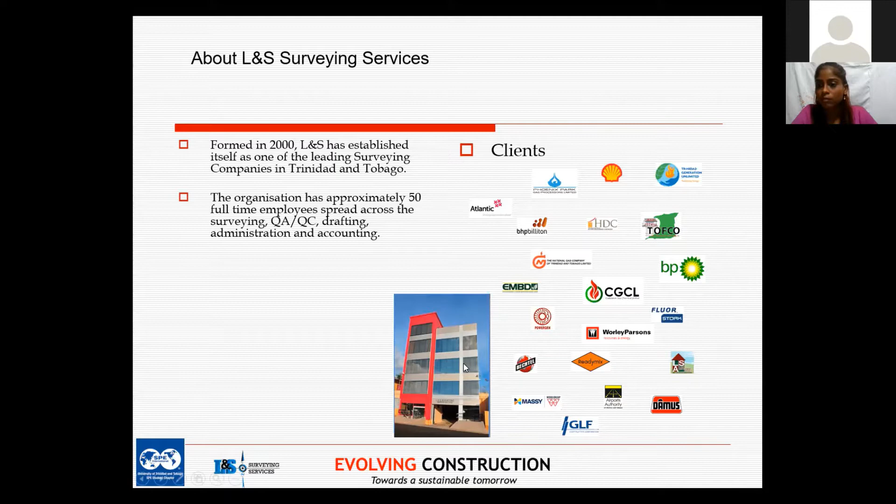So L&S Surveying started in 2000, and it established itself as one of the leading surveying companies. We have approximately 50 employees. If you look at the picture of our building there, we have 3 main floors. The first floor is dedicated for surveying alone. The second floor is for the drafting department and QAQC. And the third floor deals with admin and accounting.

As I said before, most of our projects are really in the engineering field. I think probably 80 to 85% of our revenue comes from the energy industry.

So we do laser scan surveys, as you should guess. Underground detection and protection, whereby we use equipment like ground probing radar and a pipeline locator to find underground features, and UAV mapping. Now these 3 services are what we call our advanced services, and these are the services we think set ourselves apart from the competition, because not many surveyors have these 3 pieces of services within their arsenal. Some may have 1, others may have 2, but not all 3.

Then we have normal topographic surveys, which most surveyors would do, hydrographic surveys, surveys on the sea, GIS, drafting services, and cadastral surveys or boundary surveys whereby people establish legal limits for their land. So that's a snapshot of L&S Surveying Services.

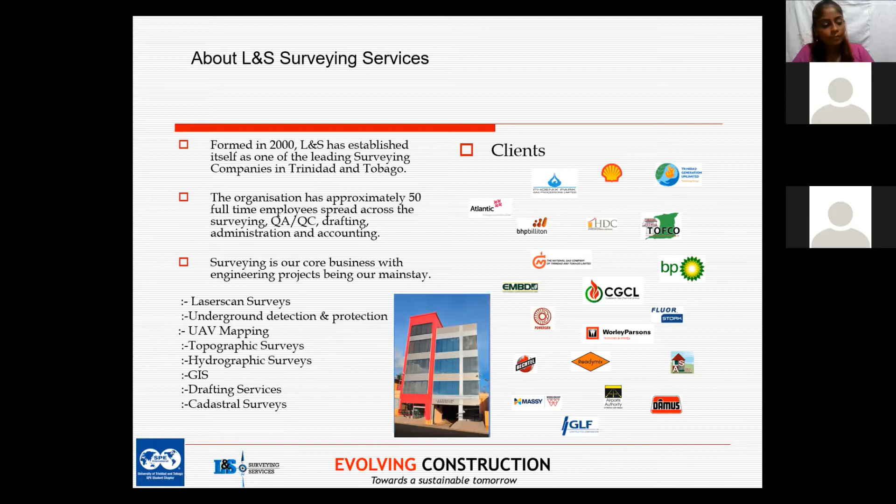So what is laser scanning? I tell my students we need to look for 4 keywords: automated, rapid, reflectorless, laser. You can pull those 4 words out alone and use it. So, an automated, rapid, reflectorless method by which measurements are obtained to recreate the environment through the use of a laser.

So people familiar with surveying could have an actual total station that takes prism-less shots with a laser, but it's not a laser scanner because it's not rapid, and some are not automated. We do have total stations which are automated, giving reflectorless shots with a laser, but not rapid enough. Rapid is when we're speaking about points that reach tens of thousands of points per second it could capture.

So laser scanners are grouped basically in two categories: time of flight, which gets the distance ranging from measuring the time and the speed of light, and the other uses a phase shift. Back in the mid-80s, the first reflectorless distance meter was developed, and only in the late 90s did we get the first laser scanner. It was big, bulky, ugly, heavy, and it did only 1,000 points per second.

Around early 2000s, we had the first set of phase-based scanners. As you can see, it's much smaller, a lot of cables still hanging out. And you're realizing that some geologists were more using the technology, because back then there were no photos. You just get millions and millions of points, and when you zoom in, you can't recognize anything. You had to zoom out.

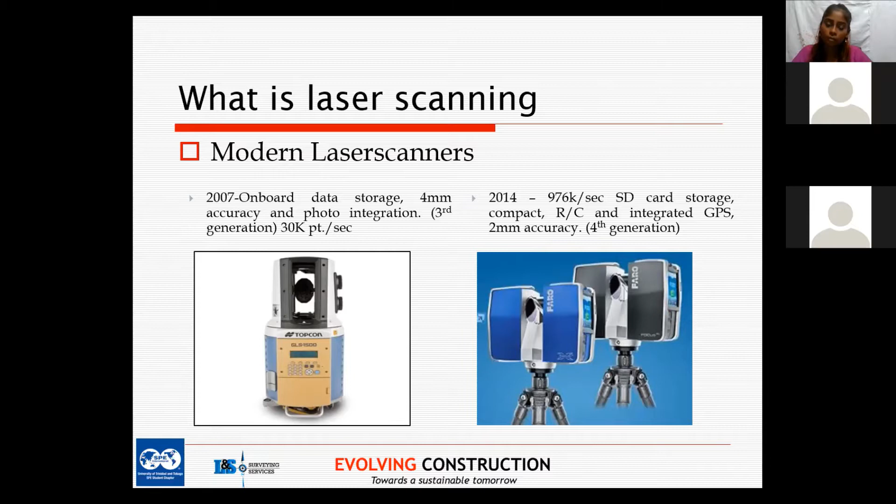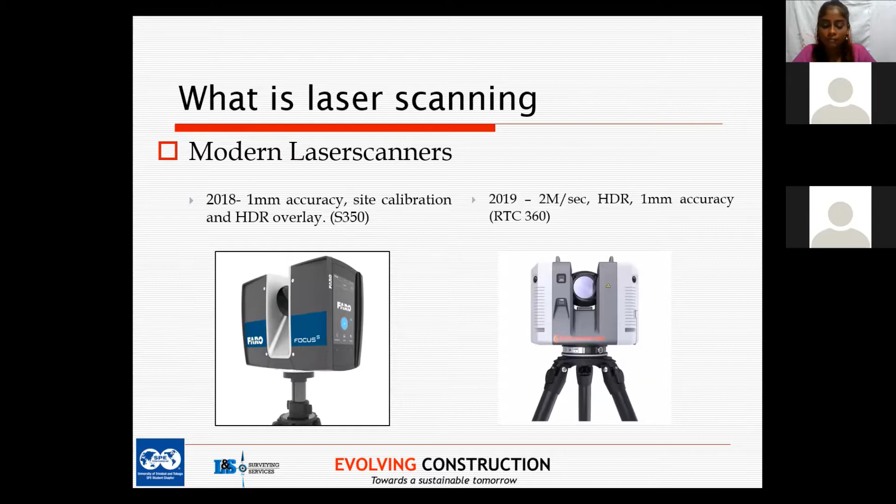And then now, 2018, we have 1mm accuracy, nice feature, site calibration feature, have HDR overlay, which is high dynamic range, whereby photos are taken at different ISO values and overlaid to get a nice rich photo. And 2019, we've seen Leica come out with similar type equipment, but of course it's 2 million points per second now. So as the years go by, every manufacturer tries to outdo each other a little bit.

So the scanner measures angles in the horizontal and vertical plane, and it also takes a distance to get an XYZ coordinate. The intensity of the return is also recorded, and the resultant of a total scan is known as a point cloud. So on the left there, we have the Leica machine, and you can see in the horizontal plane it will spin a full 360 degrees, and in the vertical plane it will go just about 270 degrees. To the right is a resultant point cloud. It's not a colored point cloud, it's probably one based on intensity, and you can see it's a bridge.

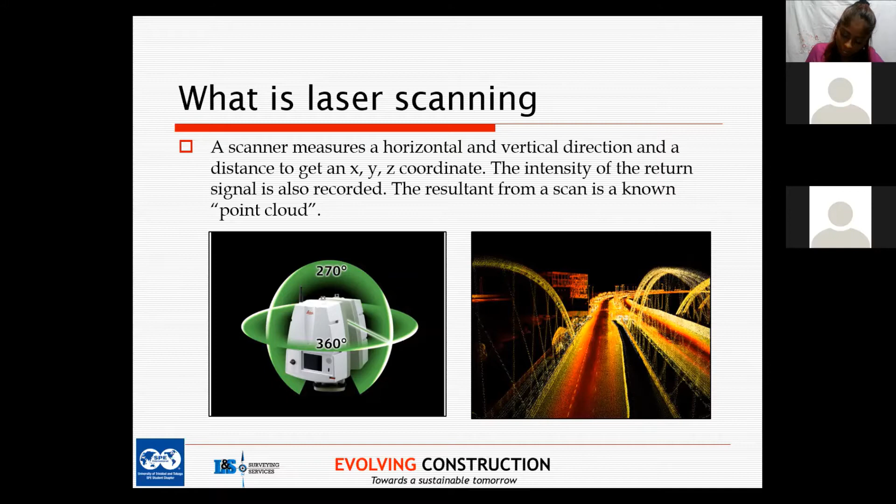The data workflow now, look at the data workflow. We have the capture, obviously the laser scanner, but we have other pieces of equipment that can be used to aid the process.

Like the photographs. People sometimes may want their work coordinated to a special network, because when you use the laser scan, you put it on, the coordinate system is at 0, 0, 0 at the center of the lens. And when you move to another station, it's 0, 0, 0 all the time. Some people want this information transformed to their local coordinate system or to a national grid. That is why you need the total station and other pieces of equipment to tie in those points for that transformation. You also have photos, which is now probably archaic, but they have some scanners that do not have an integrated camera in them.

So after the person scans, they will then take a camera, mount it on the same tripod, and take photos all around. Then they bring those photos into the processing software to add color to the points.

When we go across the data processing, the first stage is filtering. Usually when you do laser scanning, you don't really stop traffic, so you may have people walking past, vehicles passing, a bird flying through. All that information is captured, and some data filter needs to take place at that point in time.

After filtering, registration takes place. Every single setup you have, the coordinate system starts at a new origin as 0,0,0. Registration is the process by which all these scans are placed in one homogeneous coordinate system, positioned in relation to each other. It's like building up a puzzle.

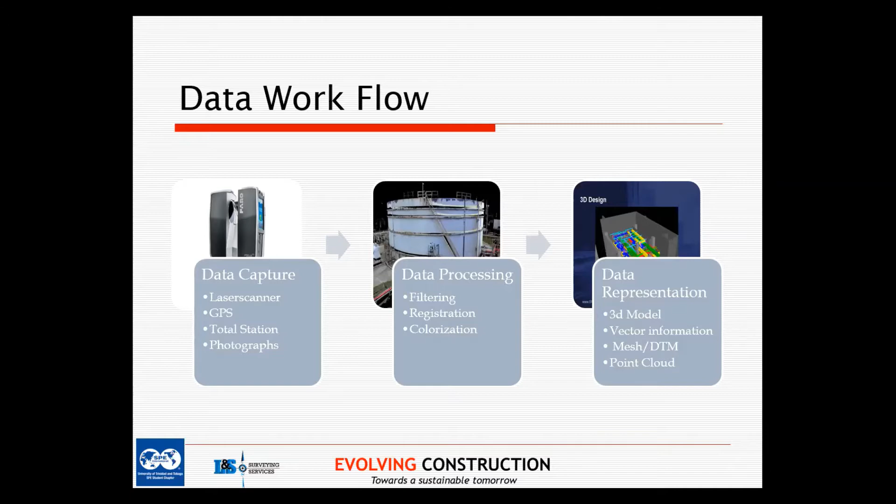Some scanning considerations: you must have line of sight. This is not a magic trick - you can't scan behind a wall and expect information behind to appear. Line of sight is a must.

Scan rates, for it to be considered laser scanning, should be almost 0.75 of a million to 2 million points per second. Operating temperatures in very hot conditions wouldn't affect us in Trinidad and Tobago, but probably in deserts where temperatures reach around 40 to 50 degrees, this scanner would not operate. And in very cool temperatures, minus degrees, this scanner wouldn't operate either because of the lasers emitted.

Weather conditions - we don't have any snow in Trinidad and Tobago, but rain and very dusty areas, we could actually see that in the data when we process it. The type of surface is very important - the texture or how reflective it is, and the angle of return is a big thing, especially when laser scanning around glass.

Let's say you have a glass window. The laser scanner will go through the glass, hit whatever body is behind, and come back at you - in that case, that's not so bad. The problem exists when you're at an angle to the glass and get total internal reflection, whereby the beam hits the glass, doesn't penetrate it, goes behind you, hits a solid object, comes back to the glass, and then enters the laser scanner.

So what you get is a much longer distance pointing at an angle. If a wall is behind you, that wall is now projected in the data in front of the scanner at twice the distance it actually is behind you. That's a big thing in laser scanning in terms of windows and the issues it could bring up.

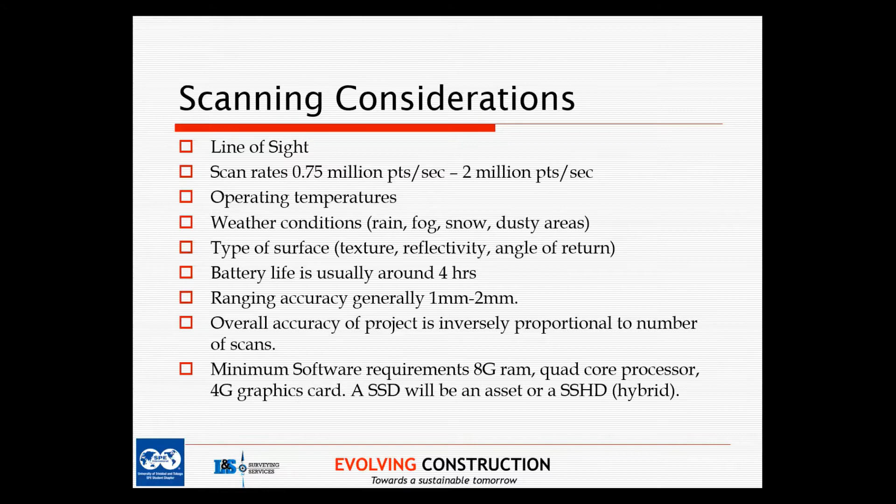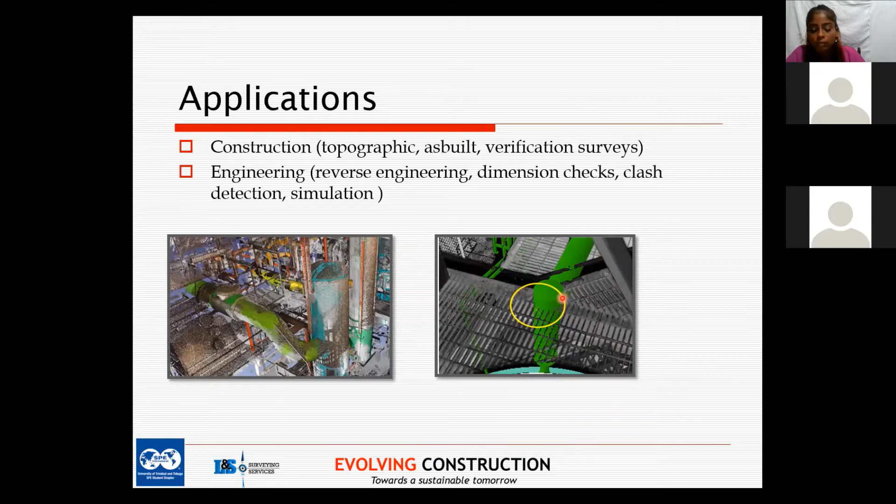There's a backdrop on this job, basically the Red House restoration project. Some of the walls and columns, an old structure, they wanted to reinforce using steel rods - expensive stainless steel rods. So they wanted the exact distance from the ring beam going all the way down to the ground floor. Because they're exposed, we had to actually scan floor by floor by floor. And with the point cloud, we were able to pull the dimensions to give them the exact lengths to cut. That was the initial job.

Then it turned out, okay, since we could do that, let's check verticality of the walls. And of course, dimension extraction for other parts of the Red House. So you see how laser scanning, in one breath they wanted one outcome, and now everybody jumped on it to get extra data out of it.

In this one here, this is a floor, showing floor flatness and floor levelness. This basically you could say is like a topo map, or probably more like a heat map, showing the elevation differences throughout the site. They have advanced software now that you could actually do an ASTM E1155 check, whereby you put your lines, and it will give you the floor flatness and floor levelness numbers spit out for you from a laser scanner.

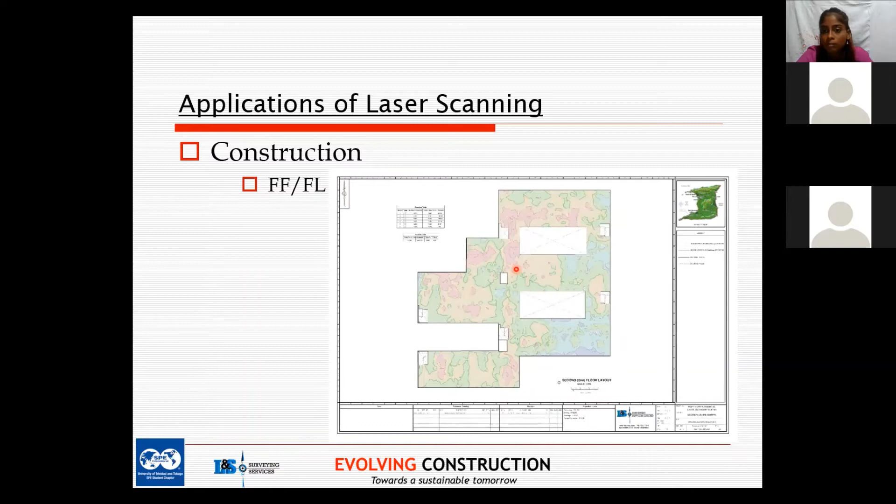We spoke about these applications - VR and AR, virtual and augmented reality. This isn't even just for entertainment. I believe I saw it used in engineering works for mechanics, whereby a school had these AR goggles, put them on, and trained mechanics how to disassemble engines, and they were able to learn much faster with this aid.

And of course, 3D printers are a big thing. There's a professor at the University of Southern California, Professor Khoshnevis, working on something called contour crafting. It's really a disruptive technology. He's actually looking to print buildings. There are some videos online - if you search contour crafting, you'll see the professor out of California, and they could actually print a building for you in 2 days.

It's not commercialized yet, but when this goes on, it will revolutionize the construction industry, because he's talking about compressive strength for the walls of at least 10,000 PSI. Imagine putting up all these walls within a day. Also, the electrical components are automatically being installed - everything is done by robots. I think he's a robotics specialist at University of Southern California.

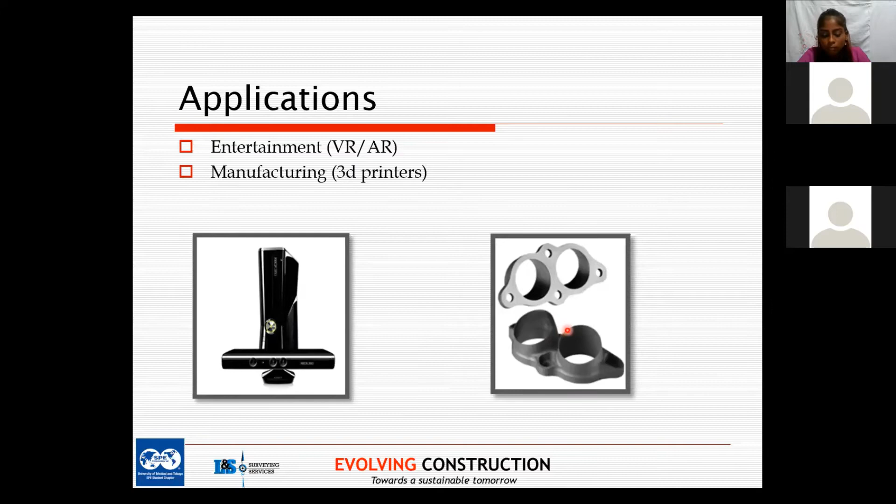So BIM, as I said before, is a process for creating and managing information in a construction project across the life cycle of that project. So construction ills - this is where BIM ties in with laser scanning to try and solve some of these ills. The first thing is, construction is slow in many cases.

There are many projects - when they say it's going to finish by December, generally 8-9 months will pass. And it doesn't have to be government projects, it could be your own home project. A builder comes, says it'll take 2 weeks, and 2 months later he's still there. There's always an excuse why something went wrong, they didn't expect this, that kind of stuff.

Wasteful at times - many times people may order too much, or do something in the wrong position resulting in rework. This is a big issue with construction. I had a guy come by to do a ceiling, and he said buy X amount of material, then realized it was too much. I have about 3 or 4 pieces of material just wasted at the back of the house.

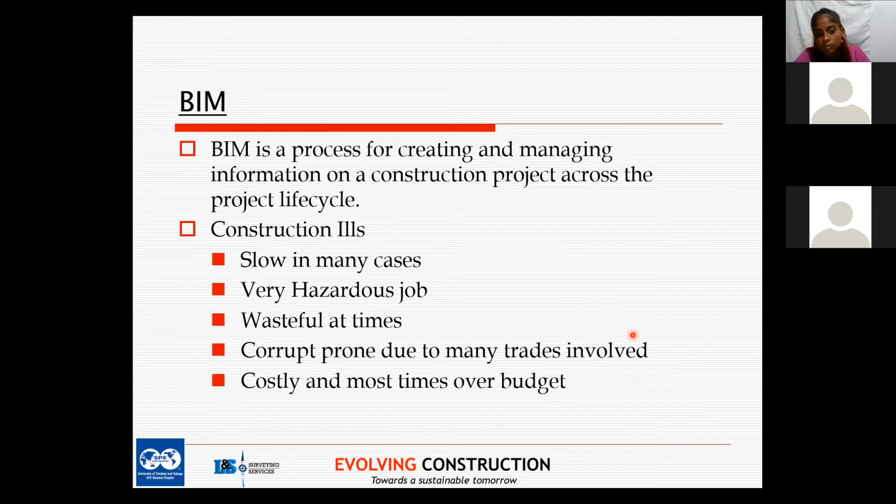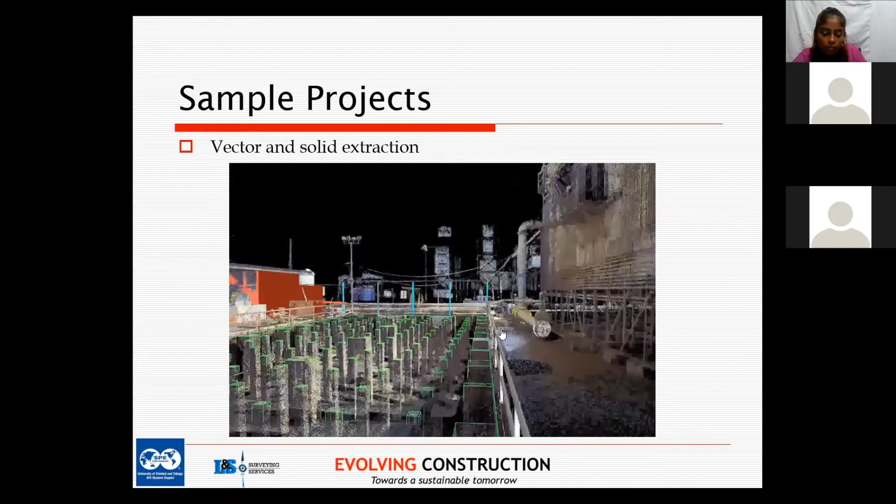So I'm going to play the video here now, and we'll be going through the site here, and you can see the green lines there represent the vector extraction of the supports. If you look at the right-hand side here, you see the yellow a little bit - that is the actual solid model within the point cloud. It's coming in and out sometimes. When you see that, the modeling is very close to the actual point cloud.

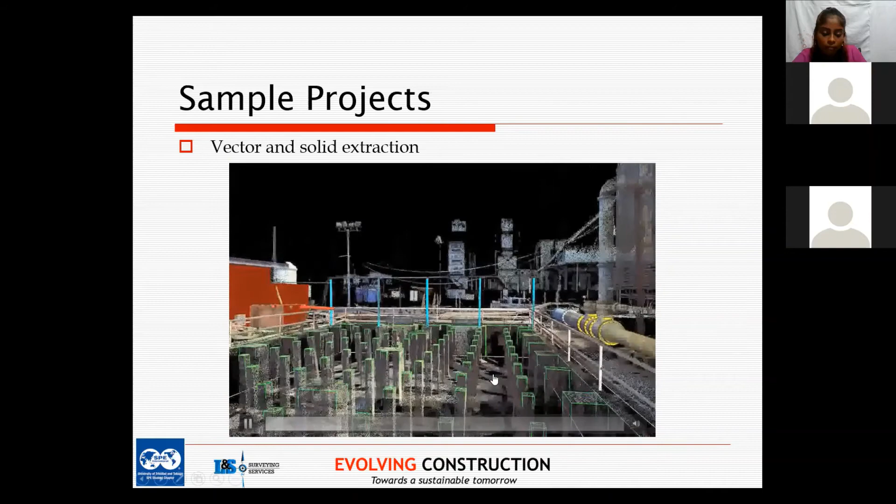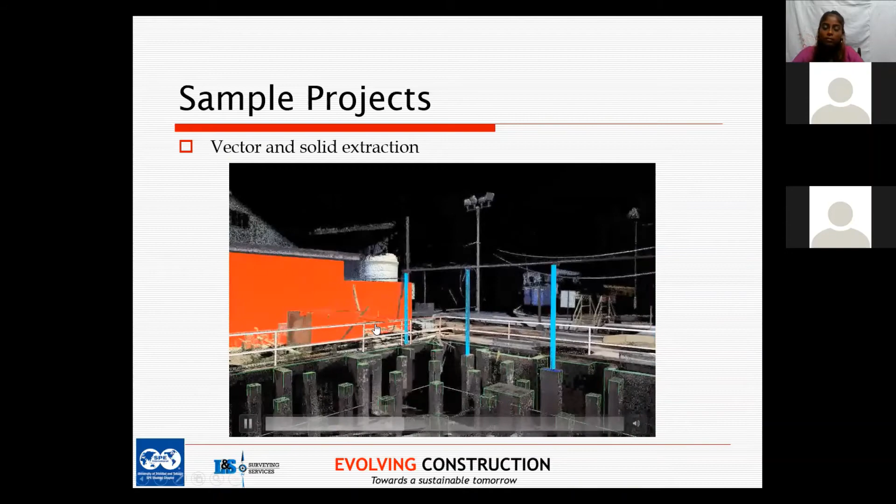We also took up some of the H-beams or I-beams here, modeled that, and the base plate. There was a wall on this side, and a tank, and a face of a building - just wanted those dimensions. All that was done within, I would say, a day. The scanning was done in about an hour, processed for about an hour and a half to clean the data, convert it to the appropriate software for extraction, and then it took a day to model this section. This was really a big time savings for them.

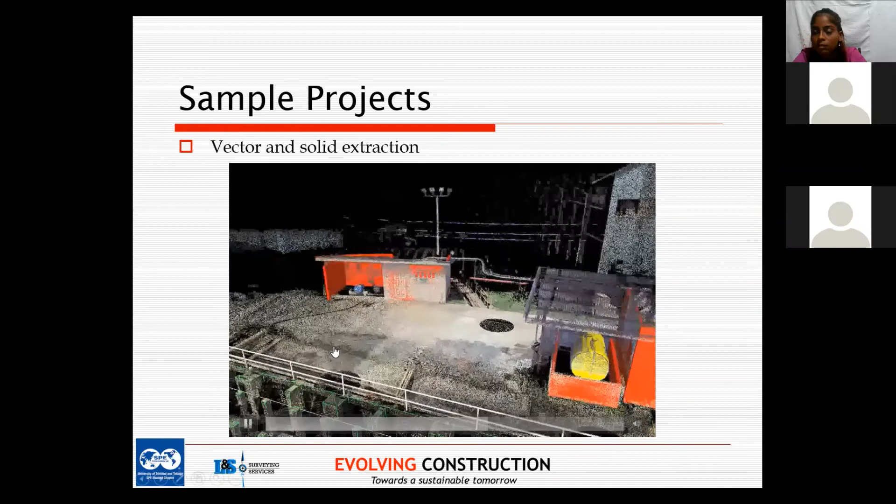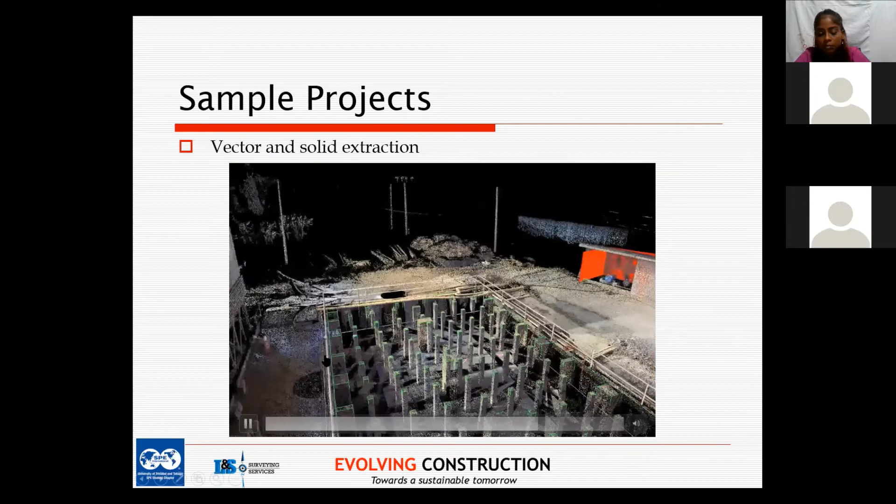This spot here where the circle is represents where the scanner was set up, so you usually don't get data over that point. I think one point was here, one point was on the opposite side, one point was here, and one point at the top. So there were really about 4 setup points.

And this is the pipe that was modeled using the catalog, so this is intelligent modeling. Once you know the pipe specs, you go into the catalog, look for the pipe specs, and you can actually model along the pipe.

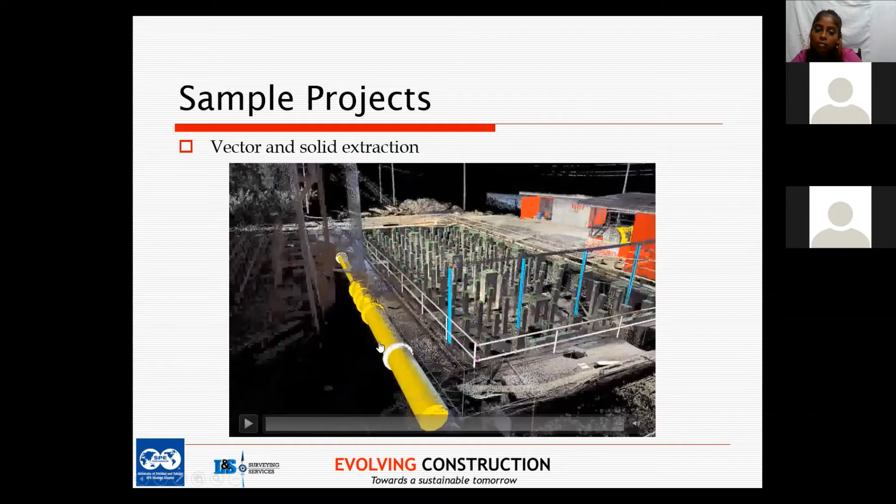This other one here now is a clash detection at Heritage Block Station, and I have this data loaded behind the computer. So this is one of the files we'll look at later on.

So what happened is that model in between there you're seeing is the bridge. We had an offshore block station and a platform, and the original bridge was demolished. And they wanted to put a new bridge in.

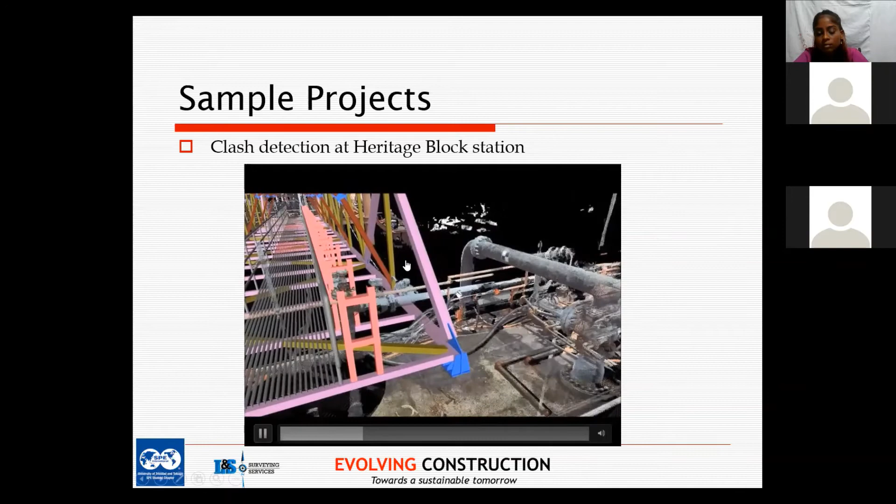So they wanted to know where all the interfaces would take place for logistics to remove them. They also wanted to make sure the bridge was long enough to fit the span, because they didn't want to mobilize a crane and all that out there, then realize this thing floating over the ocean isn't connected.

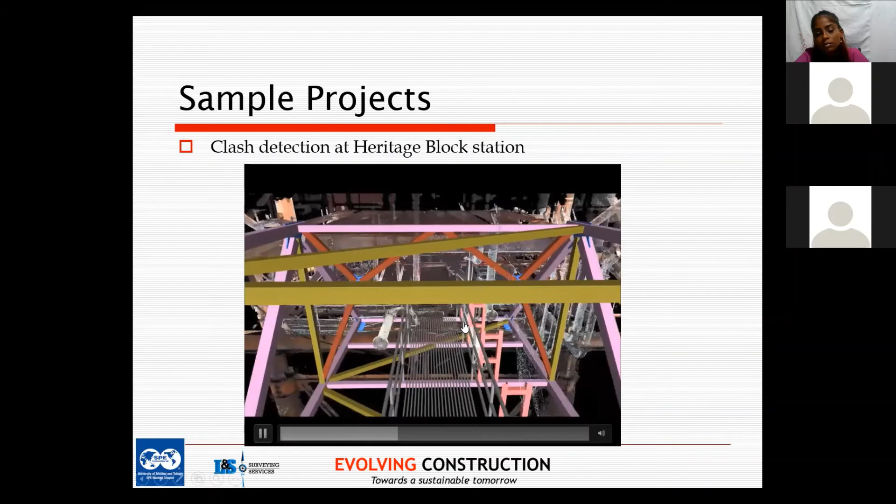So there were some interface points where the bridge was. We surveyed that manually with a total station, and then linked it to the point cloud. You can see through the point cloud here, and the pink, yellow, and brown is the actual proposed bridge.

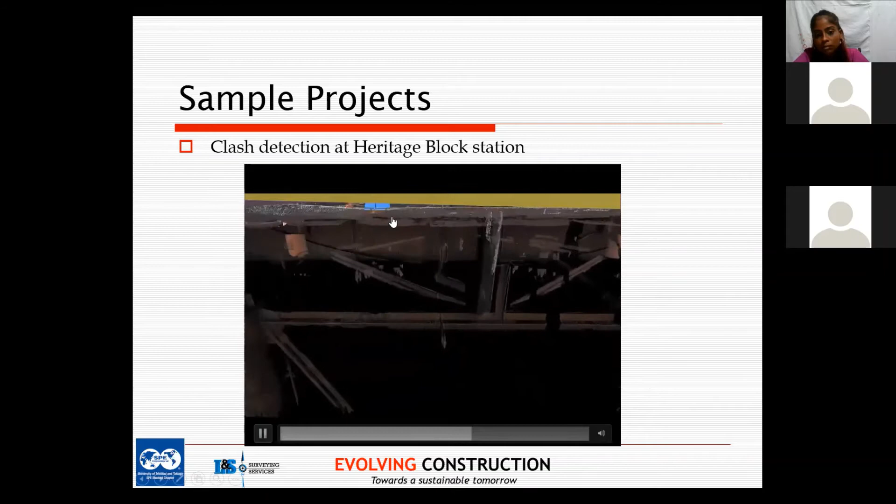I have this data here, and we'll go through it real time and run a clash detection test to see what it picks up. The client was able to determine from the report what pieces of piping needed to be moved, and then plan logistics.

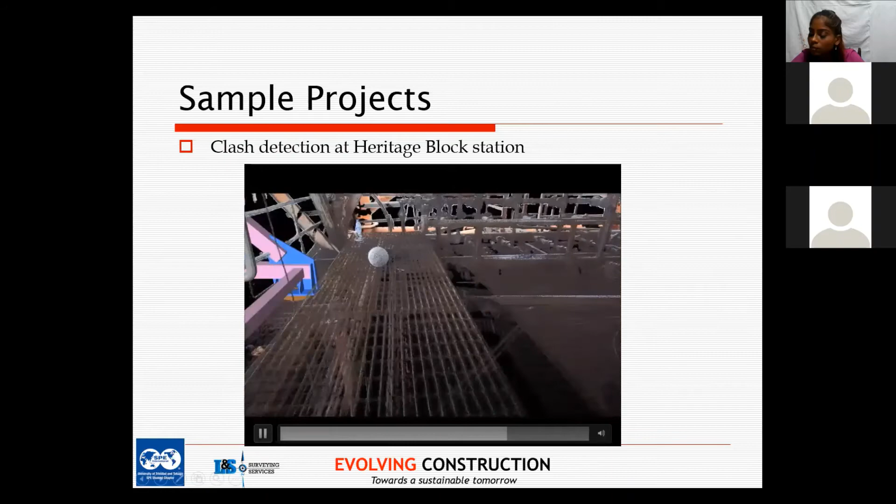We also gave them an actual drawing as output, so they could see how the bridge looked from a side view, which is important, because if the tilt is too much it may pose an HSE risk, where walking down a heavy slope could create a tripping hazard due to the angle.

And they were able to go ahead with this project and successfully put this bridge into operation. You can see all the piping inside that needed to be removed.

Some of the results, hard for most 3D people, is that with these types of jobs, 95% of the time you have to come back and give the person a 2D plan. So here we give the dimension of the bridge across, the angle it was at, and the interface points at certain areas where you may have clashes, and that was given to the client.

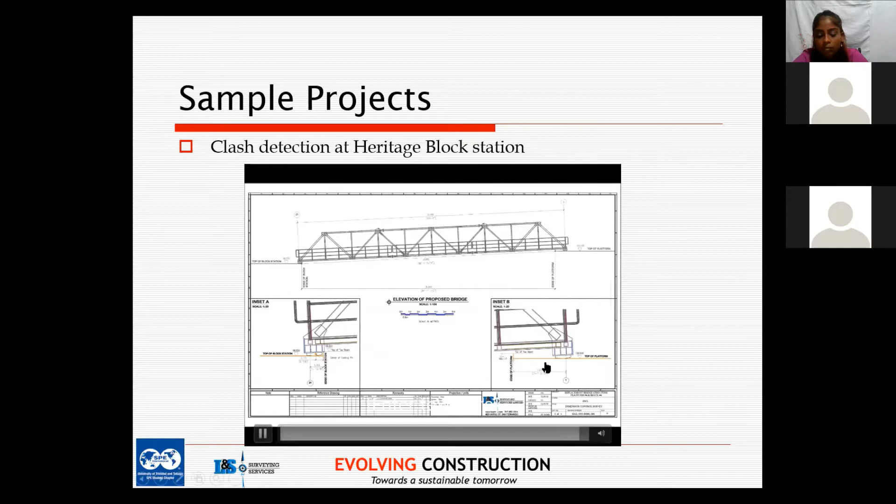So let me go across now to a spool piece verification. In the BIM life cycle, this falls under quality control, whereby a spool was built, and before installing it, they want to make sure the distances and angles are correct. We don't want to transport this to a site and realize it can't fit or work.

So they called us in and we did a laser scan of the spool pieces and then modeled it. Let me make sure the share audio is on, I think some of these may have audio later on.

We see the same life cycle there for spool verification: three scans in 30 minutes, 10 minutes per scan. Then the point clouds are brought in.

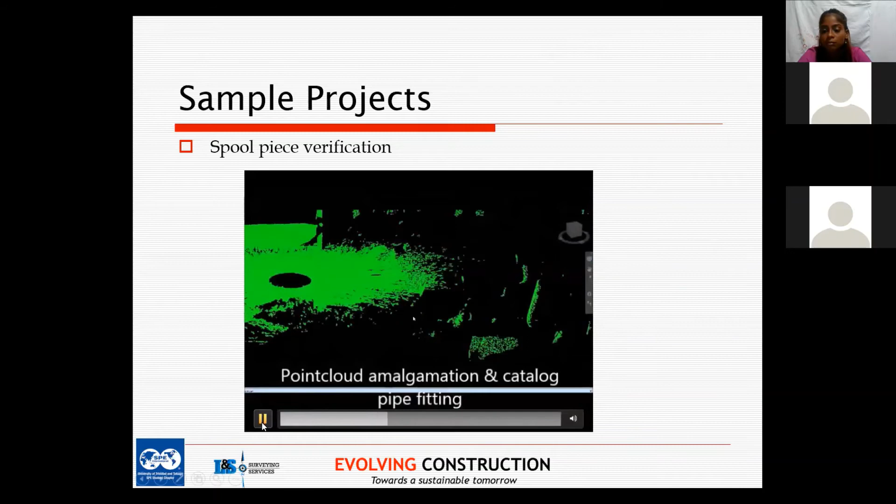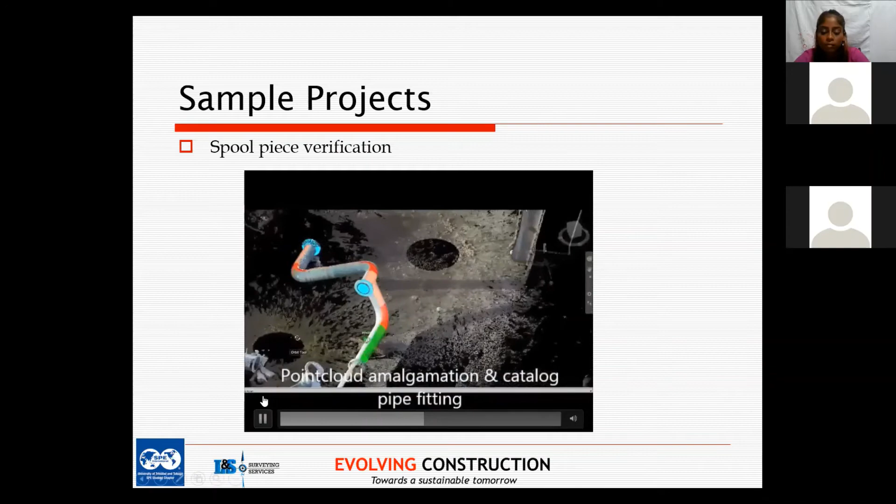From that, we start modeling, see that green line, red, pinkish line coming as the modeling takes place in between. Those were the points along which we chose for fitting the actual pipe within the wall.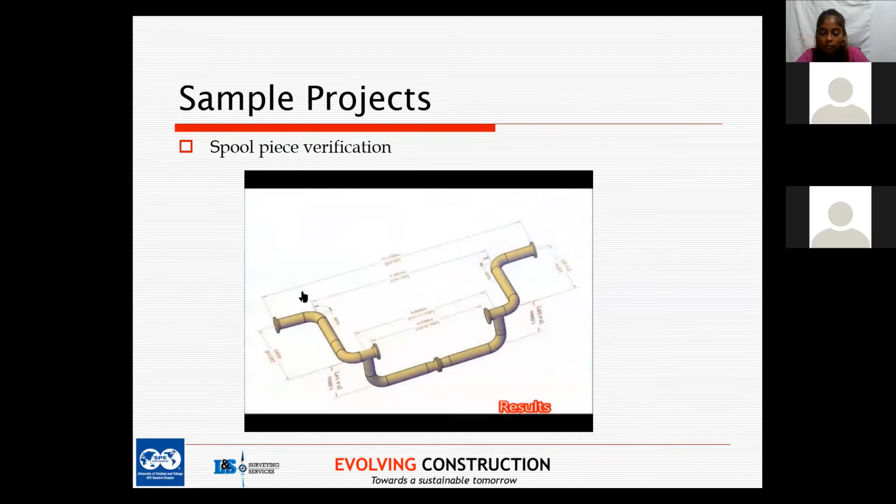But generally, traditional means would have taken a little while to do it. I'd have probably taken half a day just to take the shot for one of the pipes, but this took about 2.5 hours. Within an hour, it was modeled.

We'll go to this other video now, before we start data interrogation. This is a FARO video showing some of their products. It will show the different types of configurations we spoke about earlier - terrestrial, aerial, mobile - and then go into an actual live construction site, where the guy explains the advantages of using the Faro laser scanner.

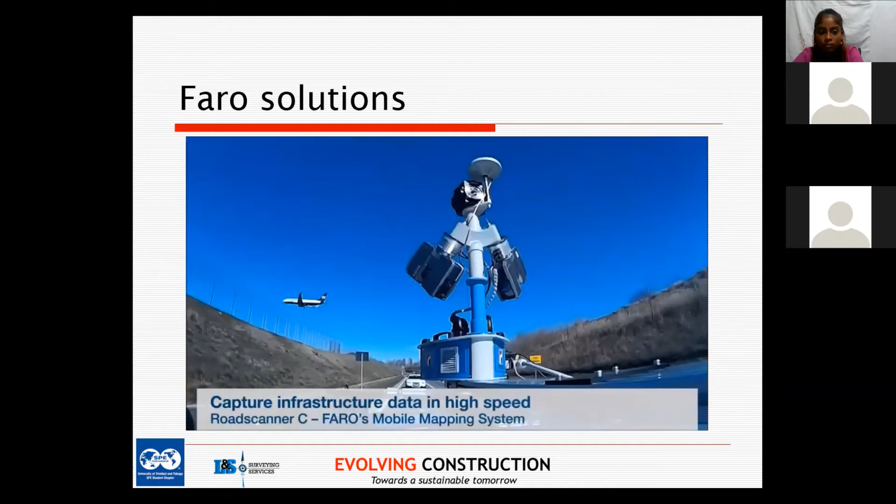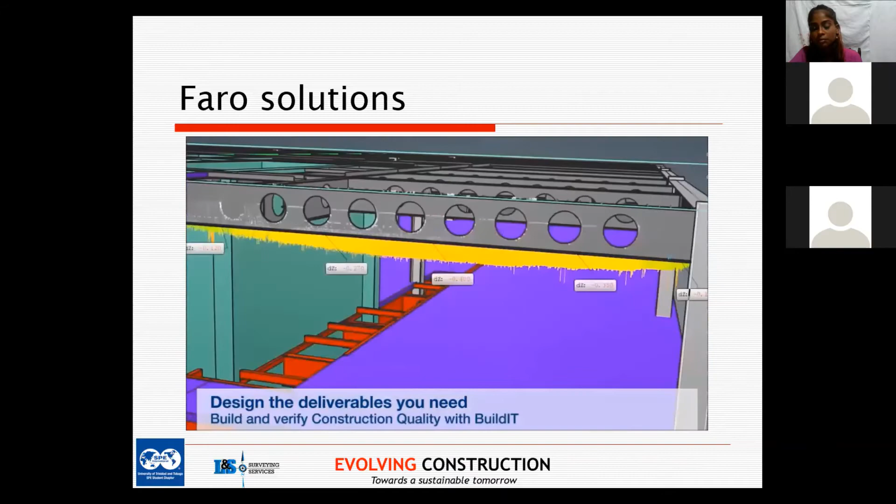Smith with Faro Technologies. I'm a senior laser scanner account manager here today with Mike Rizzo, the BIM manager with PCL Construction, on site at the new CitiTower construction project that you see behind us. But Mike, earlier today you were telling me as we were walking down here some of the benefits of utilizing the Faro laser scanner that you and PCL saw early on in the build out of this project. Yeah, actually, the first thing we did out here on our project is we came down here, did a full laser scan of all the surrounding streets so we could have an accurate as-built of everything that we're dealing with.

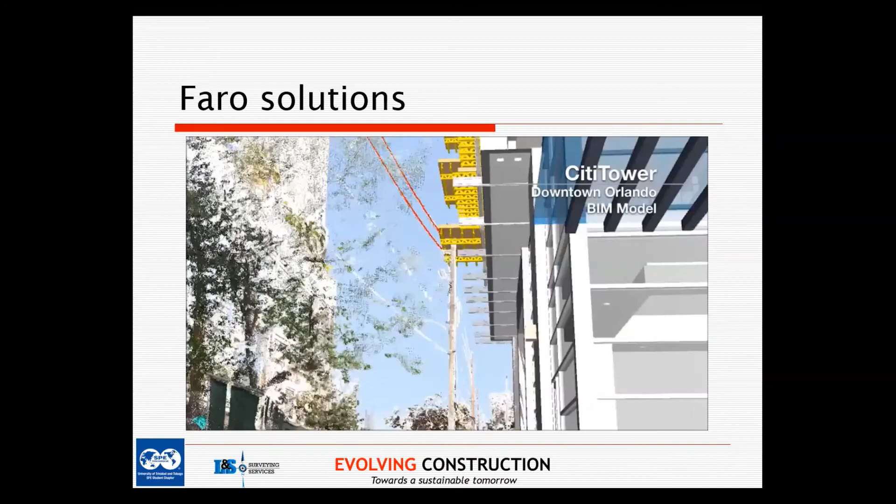Then we took that scan and we dropped the BIM model right onto it in the exact spot where it's going to go so we could see if we had any conflicts we didn't anticipate. We actually had one right here behind me where there was a telephone pole with some electrical lines on it that ended up being too close to the building that we wouldn't have noticed if we hadn't dropped the model onto that scan. So we knew we had to make some adjustments, put an outrigger on one of the lines to push it away from the building. It actually helped us in safety and in scheduling and planning. It's something we wouldn't have noticed if we hadn't had the scanner.

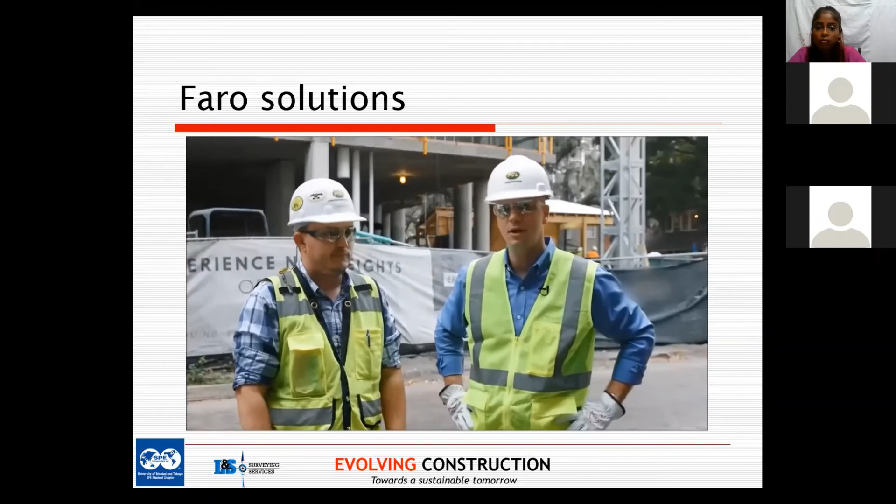Now we're going to head up to the 8th floor and show you some inside scoop on the new Faro S350 laser scanner, and show you other ways that Mike's team here is benefiting from utilizing the Faro laser scanner solution.

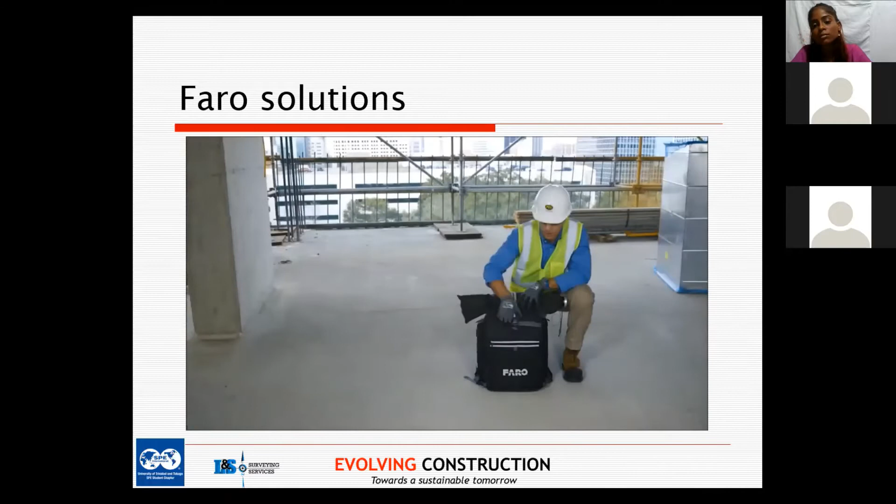So here we are now on the 8th floor of the CitiTower. Just want to show you the contents of the backpack that we brought containing our Faro S350 laser scanner. Inside the backpack contains our Faro S350 laser scanner head unit, as well as 2 lithium-ion batteries, and any sort of charging cables that you may have. This entire backpack setup, including the lightweight carbon fiber tripod, only weighs 19 pounds, so any man or woman can easily climb ladders or move throughout a job site very easily.

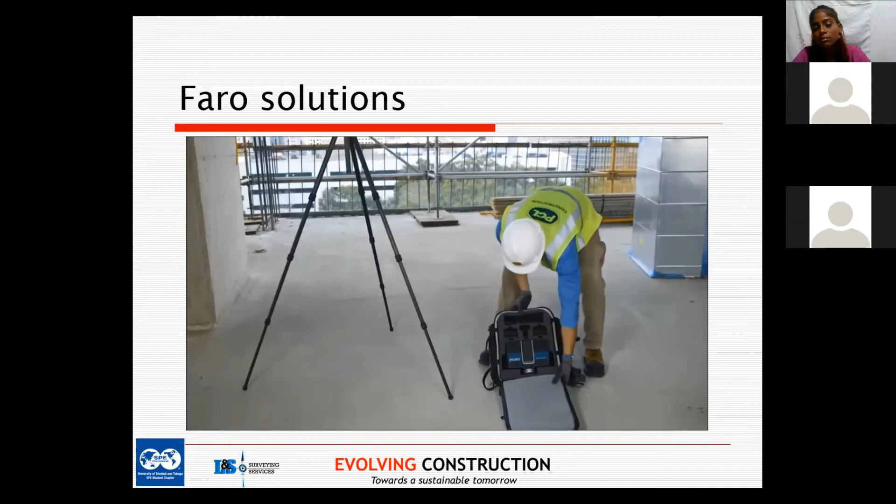One of the most obvious upgrades to the new Faro Focus S350 is this larger and luminous touchscreen display. Here the operator has full ease of use adjusting any sort of filters, parameters, or file structure inside the laser scanner itself. This luminous display also has the ability to adjust between a dark and bright feature to make it easier to see out in direct sunlight.

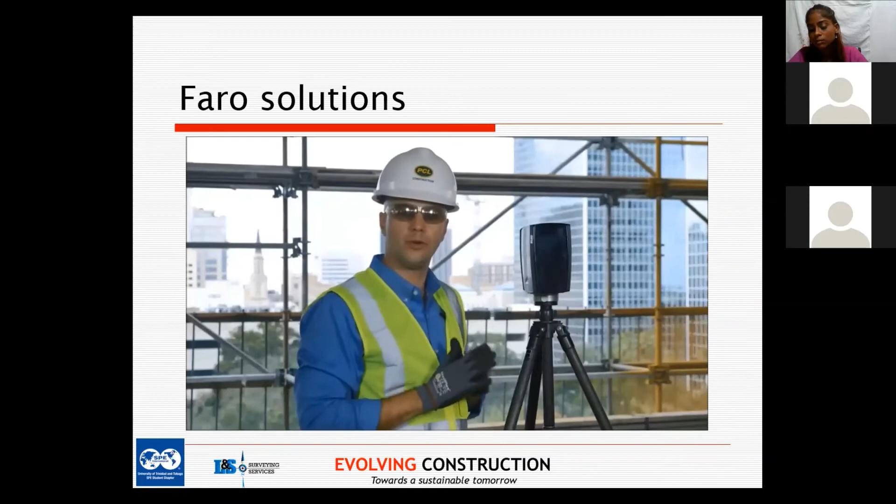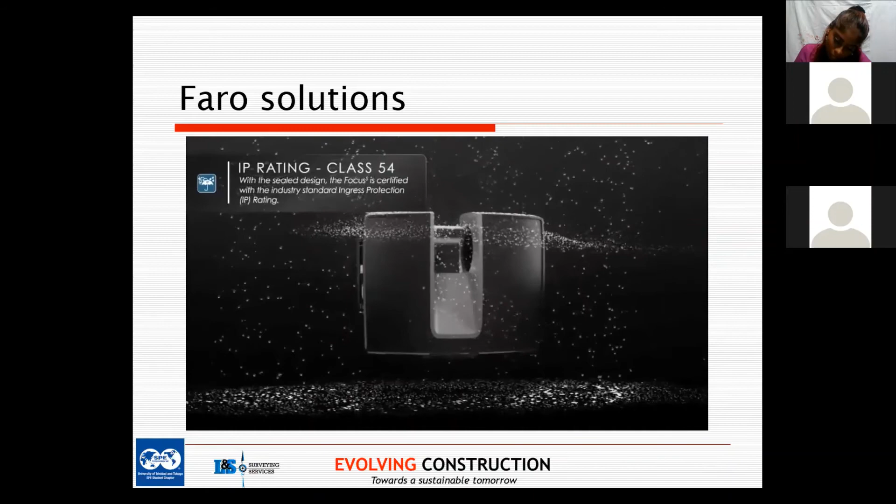Although this device may look very similar to our older S120 and X series laser scanners, this is an entire rebuild from top to bottom. This is our first fully enclosed laser scanner head unit, so as you can see, the lithium-ion battery and the SD card are built inside the head unit itself. What that allows us to do is make this our first Ingress protected, or IP54 rated, device to protect against moisture and dust. We've also extended the temperature rating of this device to as low as -4 degrees Fahrenheit and as high as 131 degrees Fahrenheit, because a lot of these devices are making their way into very hostile territory.

For more information about the practical applications of the Faro laser scanner and our end-to-end scene workflow solutions, I'd like to bring back Mike Rizzo, BIM manager with PCL Construction. Hey, Mike, can you tell us a little bit more about how you guys are benefiting from our Faro laser scanner and scene, and some of the apps you guys are using on this CitiTower build-out?

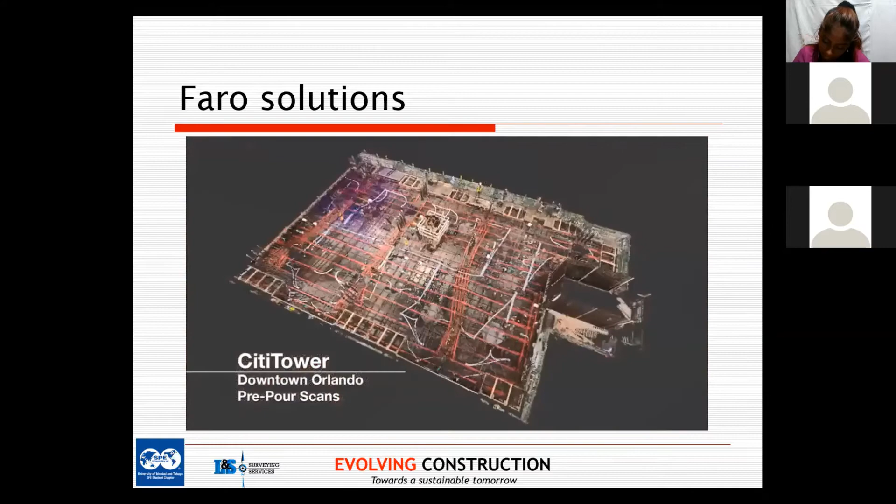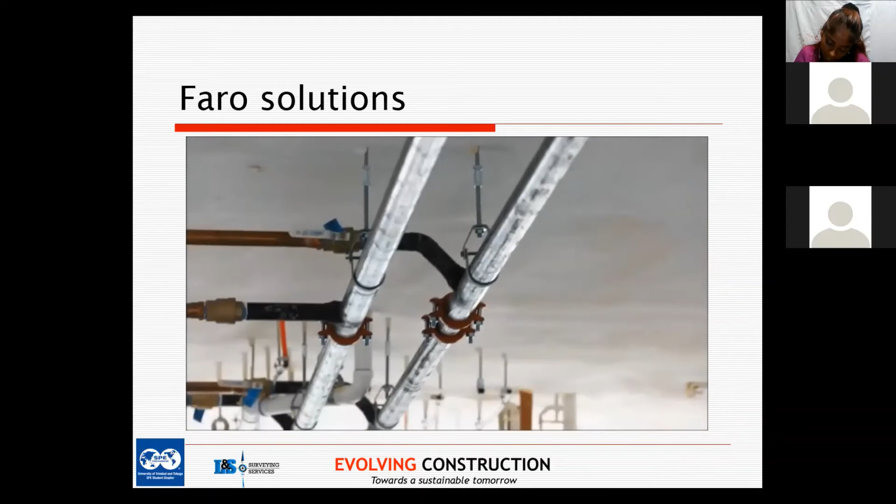In addition to the pre-pour scans, we also do post-pour scans of every one of our slabs. Then we're able to take those scans, bring them into scene, register them, then run the Rithm Builder and Inspector apps on top of that, which give us accurate heat maps as well as floor flatness and floor levelness reports, eliminating the need for bringing out a separate inspection team to do the dipstick readings. We can do it all within scene. We have all the historical data from every slab, so that's a huge time savings.

Well, thank you very much, Mike. I really appreciate it. Good luck with the final.

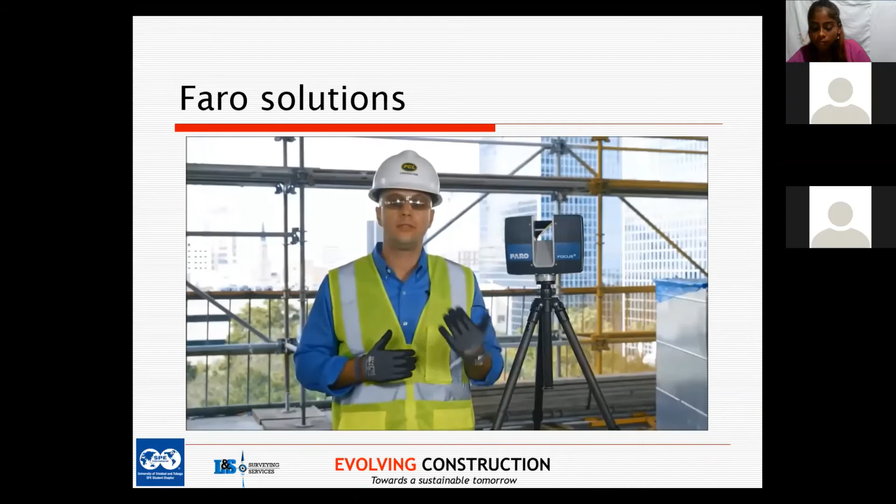In that video, you see the advantage of using the scanner, whereby there's a known piece of equipment they use to do the floor flatness and floor level, called a dipstick, which they eliminated by using the laser scanner. They also realized there would be a clash detection that was noted after scanning the surrounding area and dropping the actual proposed model within where the area is supposed to fall.

So we're going to go into the data interrogation. I'll go into two more slides, then we'll go into some live data I have on the machine, and then we'll close off and go into any kind of questions.

So basically, the work scene is what we use Faro Scene to register all our work. We have Faro Scene, and that is the registration software, the software that puts all the scans together into one homogeneous point cloud.

It will accept raw point cloud data from the FLS scanner, and it will also accept E57 information. E57 is a special format created by ASTM, formerly known as the American Society of Testing Materials. They have a code called E57. The E57 committee was created in 2006, and it meets twice a year to deal with 3D imaging systems.

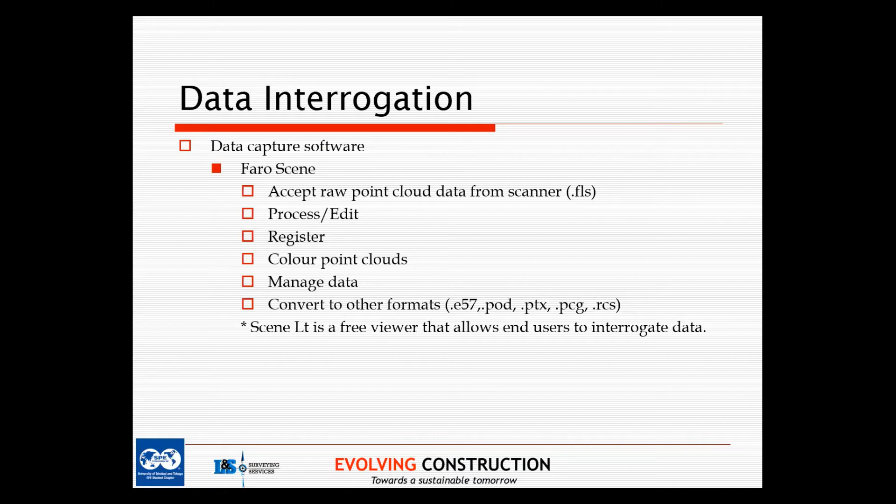So Faro Scene will import the data, you could process, edit information, register the points, color the points, manage data in there, and convert to some other formats. So you must be able to convert to E57. All the newer software, probably from 2010 onwards, must have that convert-to-E57 format.

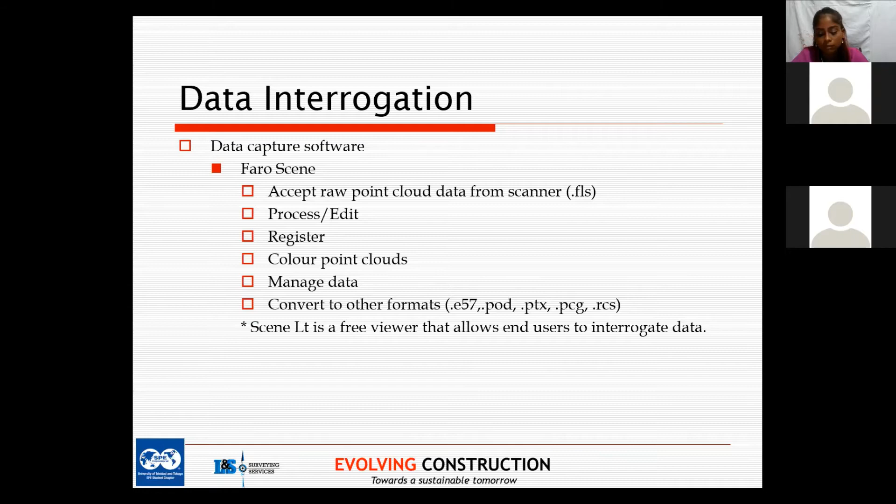Scene Light, though, is a free viewer that allows you, if somebody gives you a Faro scene file, to actually open up that FLS file and look at all the images. On top of having a point cloud, you actually get images that were taken, which is very critical sometimes when people do modeling. Now Autodesk has a software called Recap, which is now actually extracting those embedded images within the FLS and other providers of laser scanners.

But Autodesk Recap is one of those software that can take billions, or probably a limitless amount of points within the system and still be able to view and go through it. You could also edit point clouds, extract some dimensions, do modeling, or do some format changing inside of it. You can export to E57 also.

For some people, some providers like Surphaser. Surphaser is probably the best laser scanner in the world, but they don't really do a lot of promoting because they're more for the air industry, aerospace industry. Their scanners are very expensive, 100,000 plus. Generally a high resolution scanner now runs between 60 to 70,000 US, but Surphaser will probably hit you $120,000 because their scanners give 1 millimeter accuracy all the time, and most importantly the measurement angle is down to 1 second, like a 1-second total station but as a laser scanner. That's probably the only laser scanner that could give you that level of accuracy.

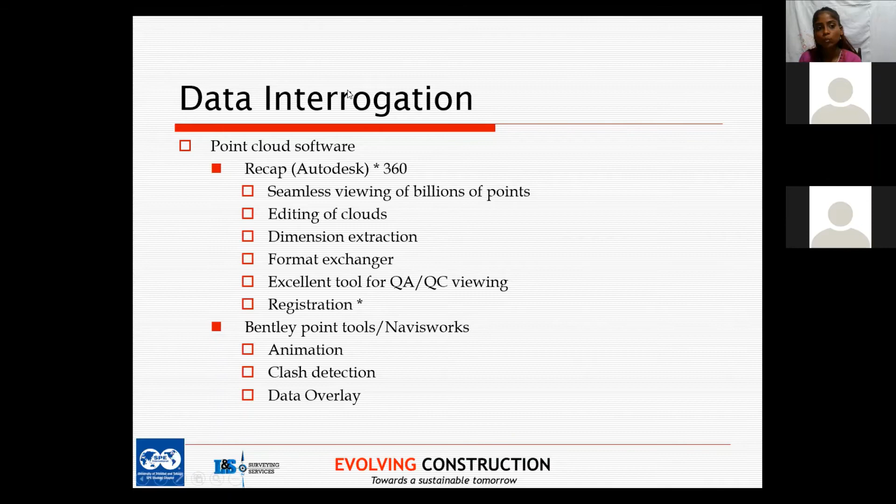Let me see for it here. All right, I think I've seen it here now.

So this should look slightly familiar. This would have been a job with the bridge I spoke about earlier on with Heritage. So this is point clouds, with really 3 setups on one side here and 4 setups on the other side here.

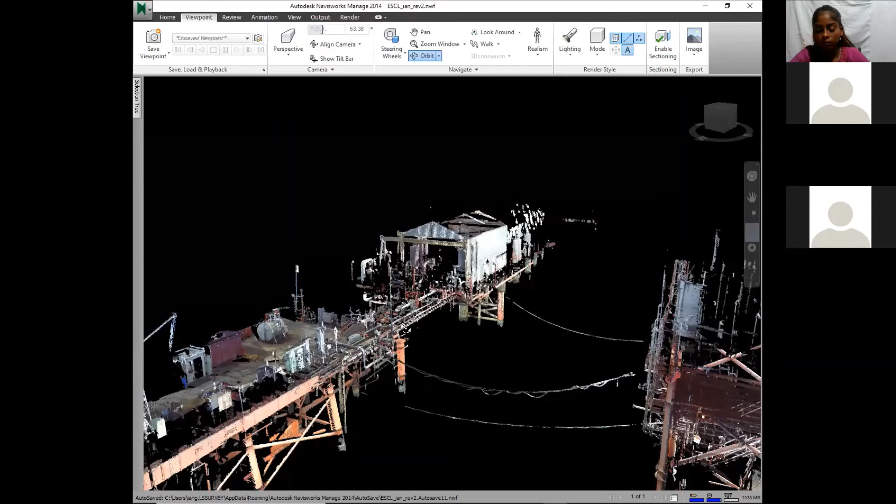Let's just kind of go in closer and you'll see the data start to reach in as we go in. All right, so...

3 setups were done on this side. You see somebody in the scene here. On the opposite side, looking around, 4 setups were done on the opposite side here.

Mind you, the face of this block station here was picked up from the opposite side. So when you set up on this side here, this face was picked up, and vice versa - when we set up on this side, this face on this side was picked up.

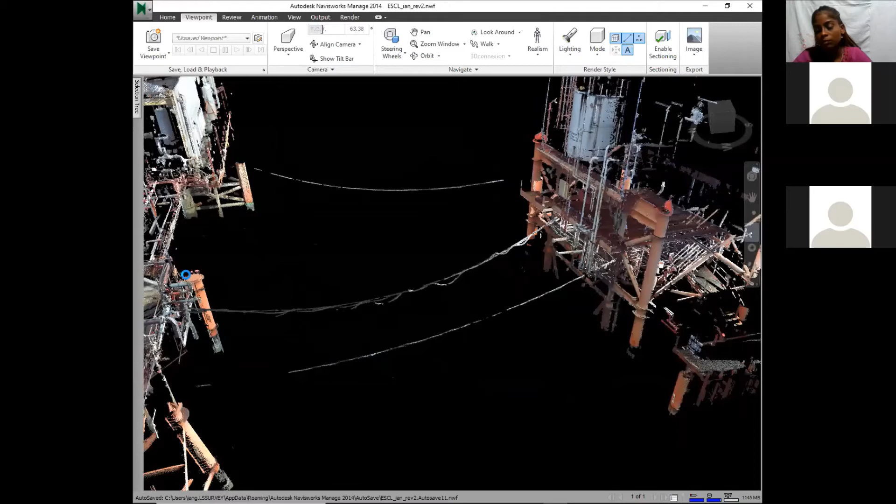So the first thing they checked was to see if the distance was such that the actual bridge that was built would fit in between.

So let me put the new model inside of there. So that is the model inside of there. So you can see the bridge.

Let's get a little bit closer here. Hope this doesn't crash.

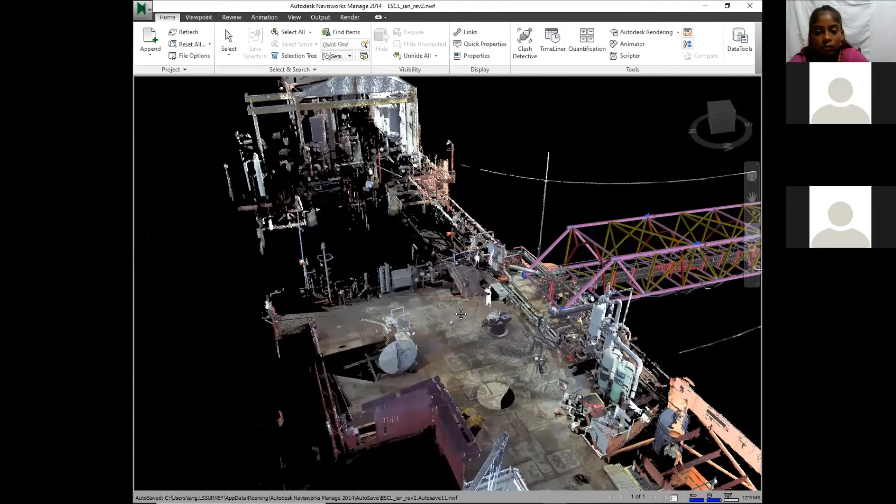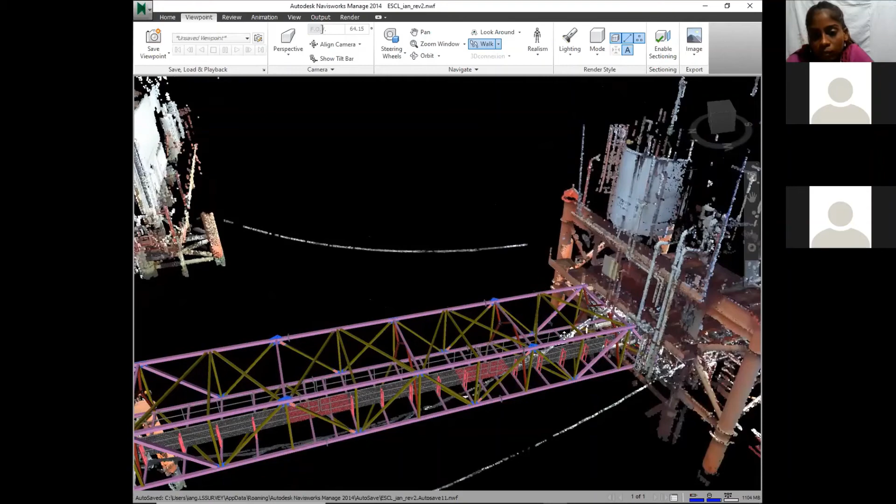So I'm going to try and go on top of the bridge there and come down. And you can see they have some lines, maybe communication type lines, across there.

We have some piping, obviously, that will have to be removed. So the first thing they wanted to find out, obviously, was if the distance there - would the bridge fit. On inspection, just visually, it looks as though everything is okay.

Bridge should fit. Of course, these two legs at the bottom there - as I said, we surveyed the original cutout points, we checked the distance, and it was good.

So within this point cloud here, we placed that. The client wanted to find out what needed to be removed for us to install this bridge.

Now, obviously, the stuff in the center here, they know for sure has to go. There'll be overhang on top and below, but then at the sides, how far out would any of these things obstruct construction? So there's something called a clash detection wizard, which we'll try to run now, if it doesn't crash.

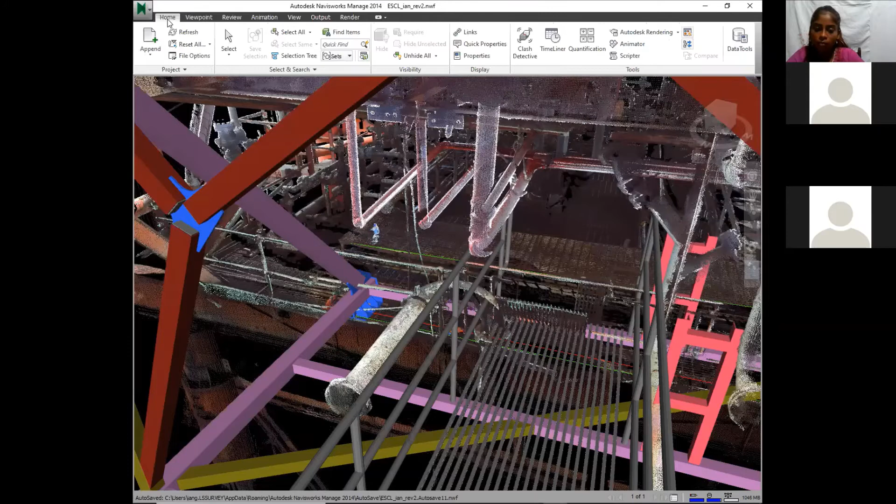So I go to the clash detective here, and in the clash detective, you see we have the RCS files, and those RCS files are basically the Recap files, and those are the point clouds. And the DWG is the actual drawing, which is the actual model.

So what you do is say 'add test.' I'm going to add a new test, right? We will call this test UTT.

And then we're going to click on this RCS. We'll take off this one, and click on that RCS and all these other RCSs. Point data, yes. On this side, this means a solid or block surface.

Our tolerance is 0.02, which is 2 centimeters, meaning this is a clearance test. So anything within 2 centimeters of the actual model, we will call a clash. Pure clash detection must intersect, but in this case we're giving it 2 centimeters. We probably could give it a larger number, but the larger the number, the wider the search engine will be and the longer the clash may run.

So in reality, if somebody needs to put in a new bridge crane, it's possible with what we have on the ocean that anything within a meter might cause a challenge. So we may have to clear stuff out a meter clear of this. We should put a meter in here, but putting a meter would probably let this run 10, 15 minutes, which I don't want. So I'm going to put it at 2 centimeters.

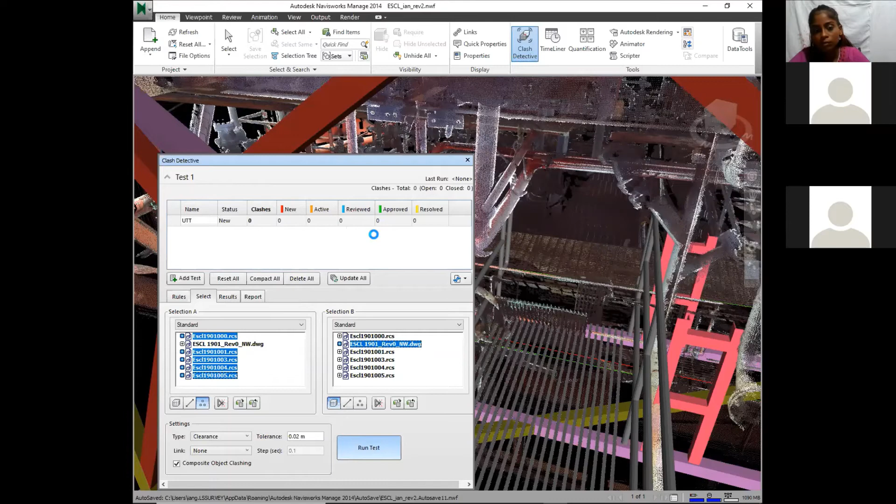So on that side we have the laser scans, and on this side we have the drawing. I'm going to hit run test. Run test, and you see it's working, finding clashes - 35, 41, it's going up the road. It's found 53 clashes, now at about 30%. Now about 50%, and 67 clashes already.

If you wanted clashes that only intersected, you're probably putting tolerance exactly at 0 meters. So it's almost finished, just about 90% now. So we have a whopping...

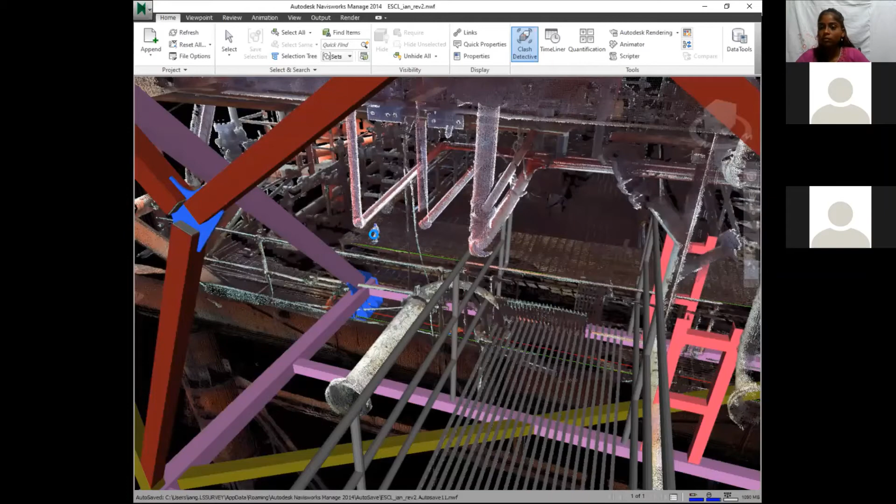So 176 clashes, and the first clash shows up there. They show the point cloud and they show the actual model where the intersection takes place as a clash for you. You can click through the drop-down menu and go to all the other clashes - it will actually just cycle through it.

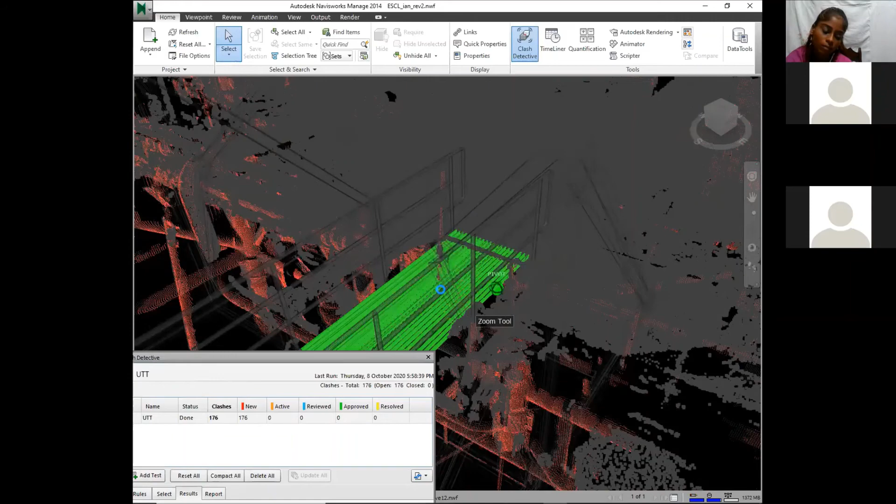So let's go down, there's a lot of clashes in here. Let's just go down to clash 107 and click on it. Clash 107 seems to be part of the grating, intersecting with something there. So you could go across on this side here and try to see exactly where that clash, where the point is actually intersecting with it. You can see here it's an area where the points are coming out, and that is a clash there - so you know for sure that will have to be removed.

You could try and choose another clash area here, clash 108. There's a piece there - let's look at it, it's there. Now in this case, it looks as though it's very close. It may not be an actual intersection, but that distance there may satisfy the 2 centimeter spacing, looking from top view, and so forth.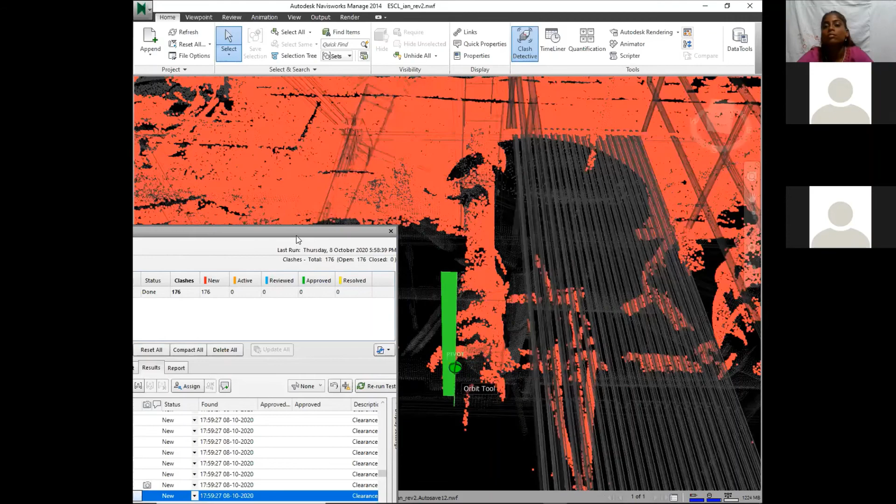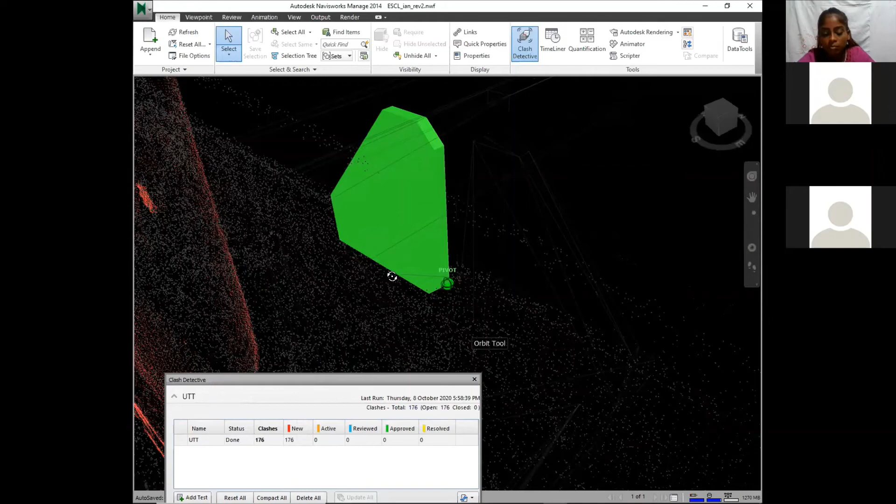So engineers would use this program to go through for clashes inside of Navisworks here. Probably just look at one more before going to the last one, the next clearance test. This seems to be more the outside here of the actual bridge itself.

So let me close this one off here now to release some memory from the computer, and we will open up the last data interrogation one.

Okay, so here we have a project. I have some lines in between. This project was a very nice project - not my project, but a very nice project whereby they usually do full BIM inside of it. They actually went to 4D, which is the time.

So if you notice, there's a word 'simulate' here. What you could do with this, you could actually take your Microsoft Project folders or files. So you go in Microsoft Project, you start a task - first thing is probably go and get legal papers. You do everything, the whole life cycle of the whole project inside there, you place inside there with your timelines.

And you could bring that Microsoft Project file into here. Once you bring that file in, everything that's a component, you could tie it into your Microsoft Project and then play it back over a time lapse. So I'm going to hit play here, and you're going to see it's simulating and the days and weeks are changing on top. You can see stuff is taking place - piles are being placed, all those white lines are piles, and you can see the building forming over a period. So it's still building, it's building again.

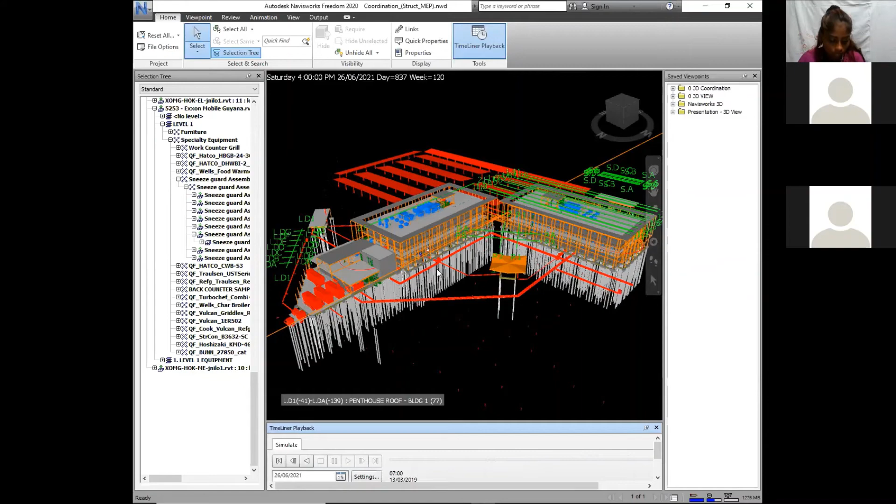You reach day 600, day 700, and I think it ends at day 800 and something. So day 837, week 120. So you see this whole time lapse here. Let's go in here. And what is good about it, this is also

intelligent. So if I was to click on one of these items here, it will come up saying pile, right? Go to the hierarchy, that's a square pile there. If I go right above it, it says pile cap. Go to this box here, pull box with some sizes. Come across here, it says wide flange.

Let me just try and minimize it in here. So that's a W10 by 68, right? So of course, the wide flange is about 10 inches and 68 pounds per foot is the weight of this actual beam. If I was to click on the actual beam, all will light up that belong to that group. If I was to click 10 by 77, all the beams in front would light up, right?

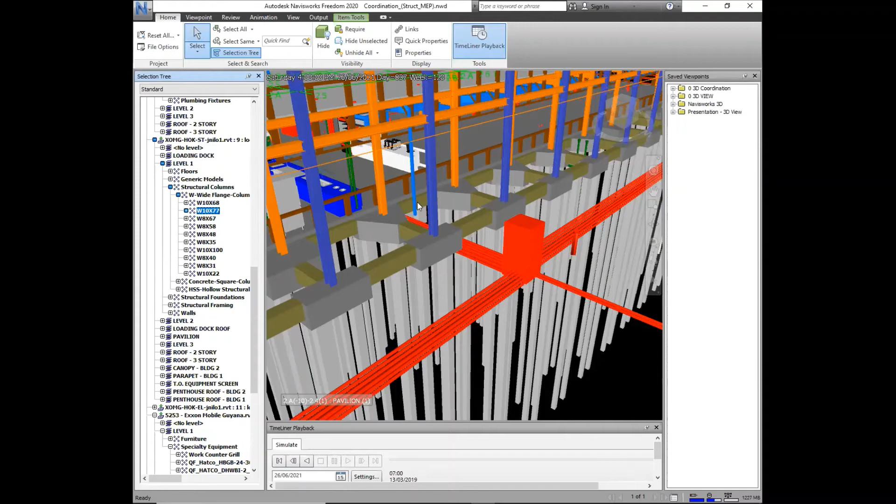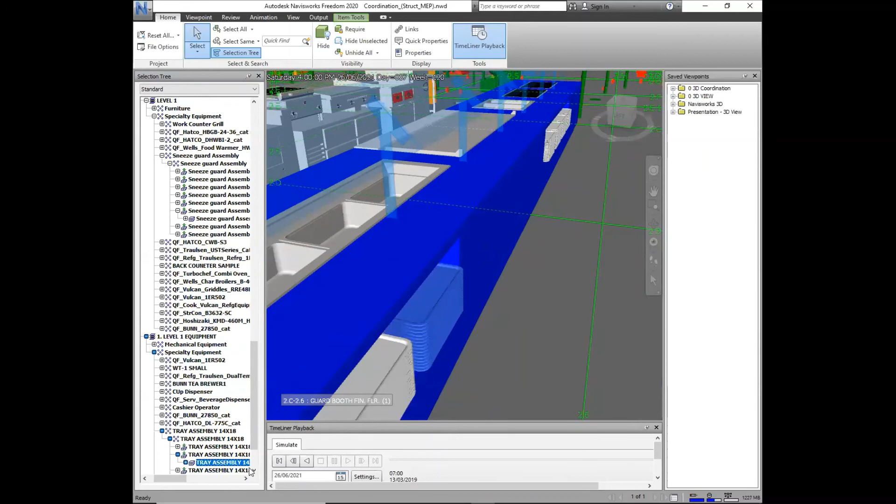Let me come inside of here now. And I'm seeing like a kitchen here. And this was done so nicely. Even the components, I click on this here, comes up. It says Turbo Chef, Combi Oven. Come back this way, click Assembly Tray, right? Everything is nicely cataloged.

Come across here, there's some dispenser or some, click on that. Yeah, beverage dispenser. So let's go to some more components.

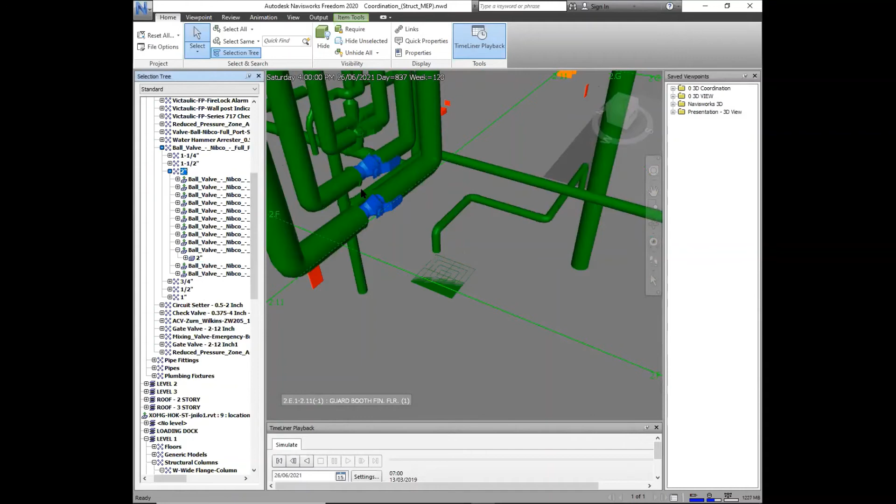I like to see valves. I love to see valves. You can see some valves here. So let me turn around here. Inside the ceiling apparently. Right, I've seen some valves here. Click on this, comes up. Right, 2-inch ball valve. If I click on the 2-inch, yeah, Nibco 2-inch ball valve is there. Click on this one here, 3/4-inch ball valve. So everything gets cataloged properly.

There'll be some red stuff. I click on this, what it says. Light and switch. Right, so every click on that foundation came up this foundation slab. So everything here has been properly cataloged, differentiated, classified in this project.

And what they could do, they could also add the costing component later on. But for now, what they have really is just a nice model that's intelligent, and it has the time lapse inside of there. So somebody could decide, hey, on week 100, where are we supposed to be at? What's supposed to be built at around week 100, right?

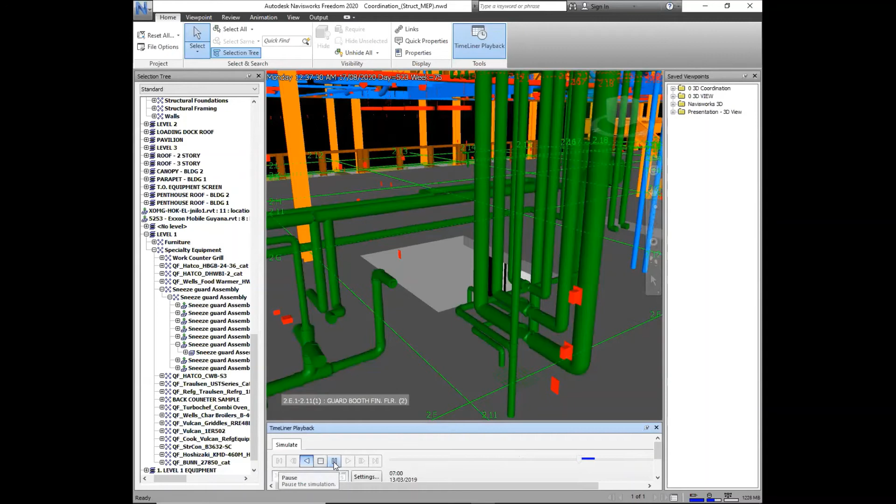So I'm reversing it. You see the weeks are going back here, going back, and things are coming off. I'm zoomed in. So you see stuff, I'm gonna pause it there. So around week 67, this piping should be coming in inside of there, right? And people could actually go and look at down there what's taking place, electric, duct bank, concrete pavement, things like that. And you have the Gantt chart at the side there,

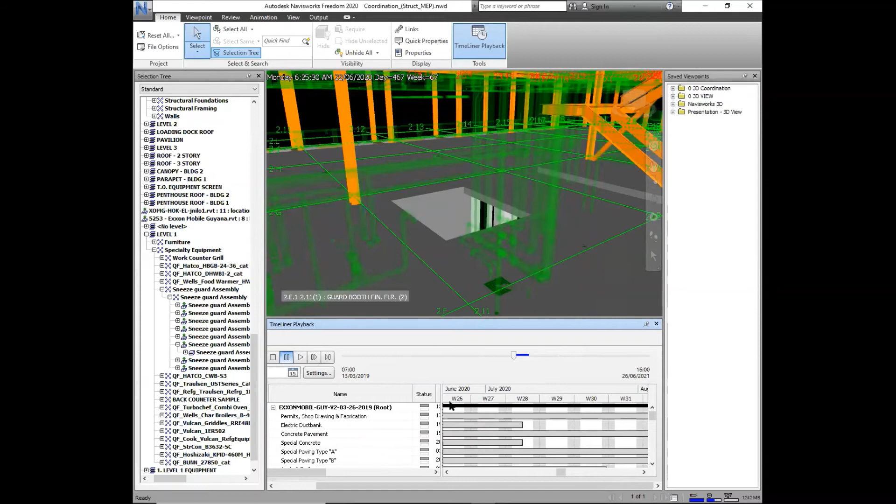right? So play it back one more time again. Let me zoom out again. So you see it's building the piles, pile caps, going up with the foundation, the structural work, flooring, piping, plumbing, electricals, everything. I mean, this takes a lot of time to put together, but when you do it, it's

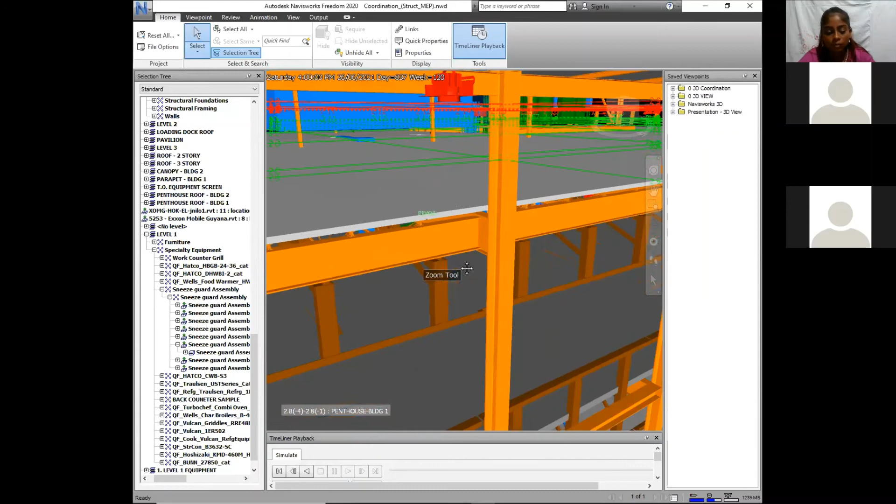phenomenal. And this is where managing of the human resources and what could be done, because once you have this on the critical path within your Microsoft projects, and you have contingencies on the critical path, you try to make sure that your project doesn't go over. There are some items that will not affect the overall completion date, but items on the critical path are very important.

This is on the roof. And this is the piping. Click on it, it might tell you what it is. This is solar heater. Yes, solar water heater, right? So the person put a lot of work and effort in putting all this together here, right?

So let us go back to the presentation now. All right, so after the data interrogation, right?

We have some point cloud analysis software. Build IT is one of them. I didn't show Build IT, and that is a big one for BIM. It validates the BIM, meaning that that nice little model we saw this now, you scan it, or scan sections of it while doing construction, and you put it within the BIM, within the model, and it would tell you if these components were placed in the correct position.

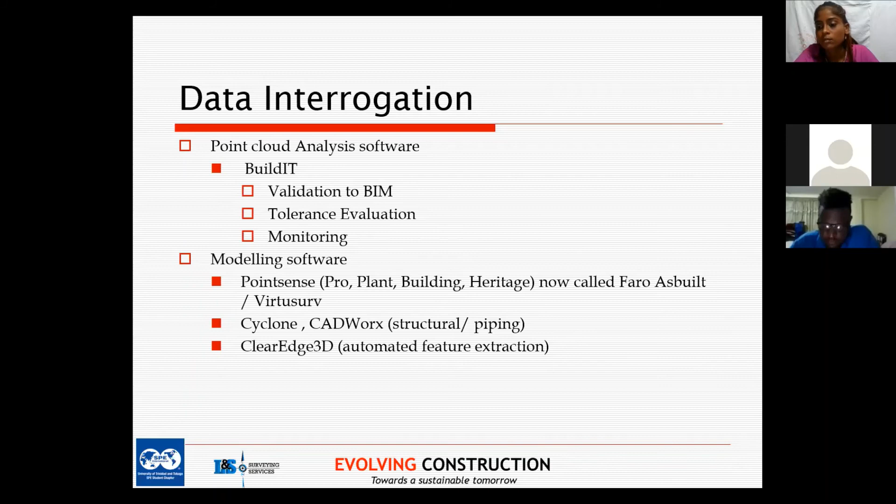It could also work out tolerance evaluation. So let's say you have some beams that are slightly bent or warped or not plumb, it will show up. And then you have a monitoring exercise also in there whereby you could actually monitor progress of a building, or even if you have earthworks whereby something happened, you can monitor movements and you can show it. The modelling software we use basically is the PointSense Pro, now called Faro As-Built or Virtusurv.

People who work basically more use the Cyclone or CADWorx system. ClearEdge 3D is an automated software that pulls out a lot of 3D extraction for you. It will be intelligent because now you need to tell the shape exactly what it is. But because of the Exchange E57 format and the opening up of the market, most of these software now are scanner independent. They will take most of the major type scanners, which will be the Leicas, the Faros, Topcons, the Riegls, the Z+F scanners, SurPhaser scanner, and those are the major scanners.

I think Trimble has a scanner also, right? But in the beginning, Trimble was actually using a Faro scanner. In the beginning, I'm not too sure, but I think it looks as though they're using a Z+F scanner now.

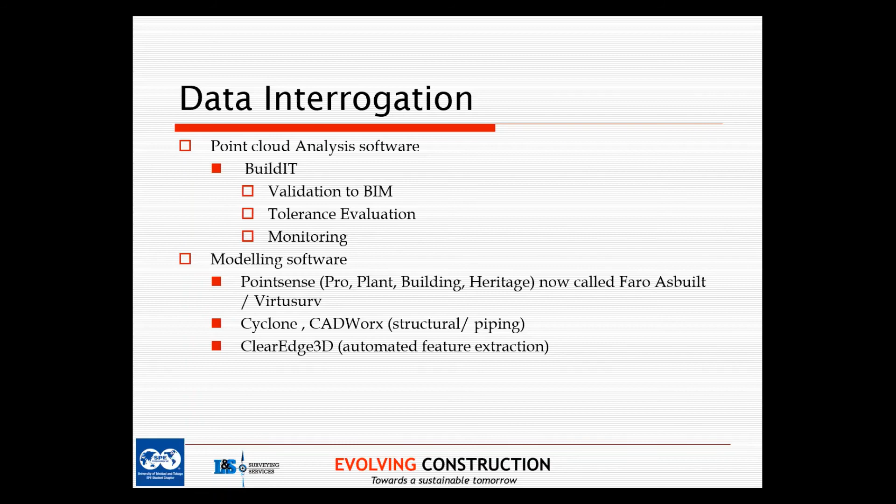Come down to the end here. So the benefits are quite clear, and they basically address some of the shortcomings or ills within construction. Number one, improve delivery time, because you have all this data, we can move faster and make decisions at a faster rate.

Elimination of rework, which looks at wastage we spoke about earlier on. People do something in the wrong position, they'll break it down, they'll cast it over. So it deals with elimination of rework.

Huge data pool, which is a big thing. So before you have all this information, many people from different facets can look at the information and share it. Not only the mechanical engineer, but the electrical engineer, the civil engineer, everybody could use the data because the data is 360 and all around.

HSSE, reduced risk. Because it's non-contact, no one has to go on scaffolding or work up on an edge to capture information. People don't need to go into dangerous spots for us to capture the information.

And the next thing is offsite inspection because of COVID. All the data can be shared online and engineers can log in on our portal. Most of the time it's some online portal and they could view the data, pull the distances, and check the progress of the project without actually going there. A lot of project managers do that, especially if the project has a foreign investor who wants to look at what's taking place week by week. Scans could be done and uploaded, and they could be looking at the progress of their project.

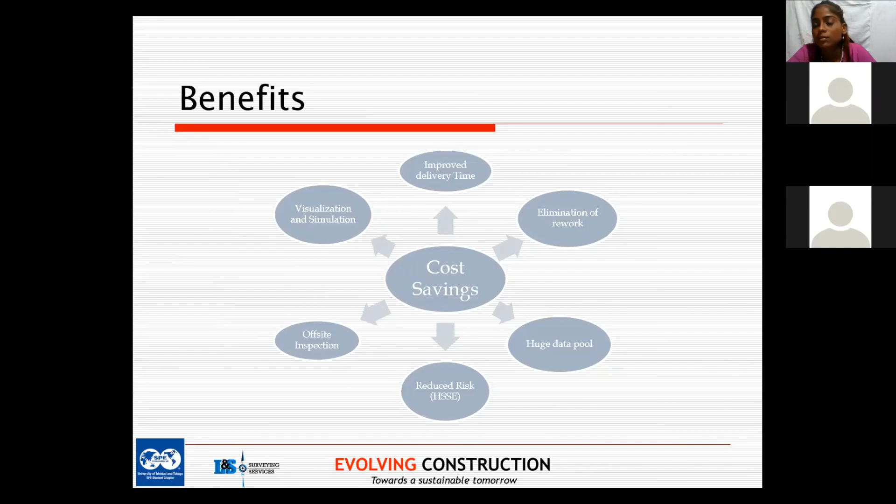Thanks so much, Mr. Grant. So I'm seeing in the chat that we have a couple of questions. Brian asked, are there developments on this tool which are AI oriented, and will it eventually reach there?

In terms of artificial intelligence, it hasn't reached there as yet. What people are looking at most, engineers are looking at an automated way in which you don't have to manually go and model stuff. They're looking at you put on a scan, and later on, boom, you see everything cataloged, wood, metal, and in time, probably based on the returns they get, they may be able to try and classify information and materials and stuff from the laser scanner.

But in terms of artificial intelligence, meaning somebody like a robot running it, it is very possible. Probably a robot could have a scanner installed and just be moving along, scanning. So no one has actually come up with the idea to build it as yet. It's still man-driven. Man goes out and he looks for the best locations.

One of the issues really is for large projects. For smaller projects, I think a robot or something may be able to go through and scan. But for large projects, you need to have some level of survey control placed in there to tie the survey in so that it doesn't lose its accuracy lower down the road. But that's a good suggestion. And I know there are a lot of people trying to develop this, whereby it just be like a black button something, and the whole world wants to go to this AI thing whereby not much human intervention is involved.